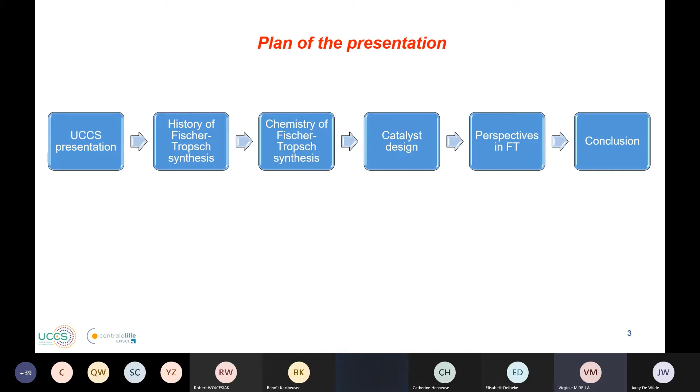Here is the plan of my presentation for today. First, I will make a brief presentation of the UCCS laboratory. Then, as I talk about Fischer-Tropsch, I will start with a brief history of the Fischer-Tropsch synthesis process. Then I will go through the chemistry of Fischer-Tropsch synthesis, meaning I will talk about the products, about olefins, and how this process occurs in Fischer-Tropsch reactors. Then I will talk about catalyst design, mentioning some important parameters such as support, active phase, promoter, and specific catalytic conditions. Then I will finish with a few perspectives for the future in Fischer-Tropsch before I conclude.

So I'm here today because I participate in the PSYCHE project. The PSYCHE project involves plastic gasification using a vortex reactor technology. This gasification produces syngas that can be valorized by Fischer-Tropsch synthesis to produce base chemicals for the chemical industry. So in this project, we have base chemical olefins, and we have the transformation of syngas via the Fischer-Tropsch process. That's what I'm going to speak about today.

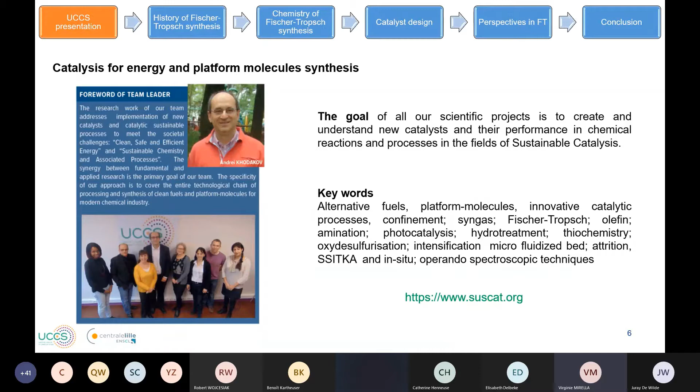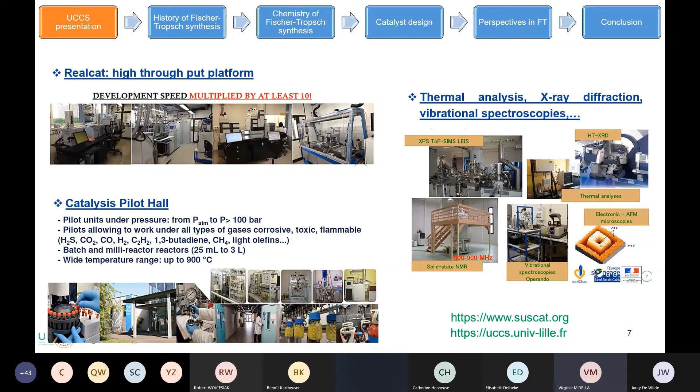In the UCCS laboratory, we have a lot of facilities, such as spectroscopy, microscopy, diffraction and thermal analysis, and so on. We also have good equipment called RealCat, a high throughput platform devoted to innovation in heterogeneous and homogeneous biocatalysis. This platform proposes a series of tools for evaluating catalyst performance, including parallel, continuous, and batch reactors, and bioreactors. We also have the catalysis pilot hall, where we perform a lot of our experiments and develop our micropilot reactors, working at high pressure, low to high temperature, with security measures since we use CO and hydrogen, which are quite dangerous gases. So that's the presentation of UCCS, my team, and the laboratory.

I will continue this lecture with two questions: what is the Fischer-Tropsch process, and how do we produce olefins?

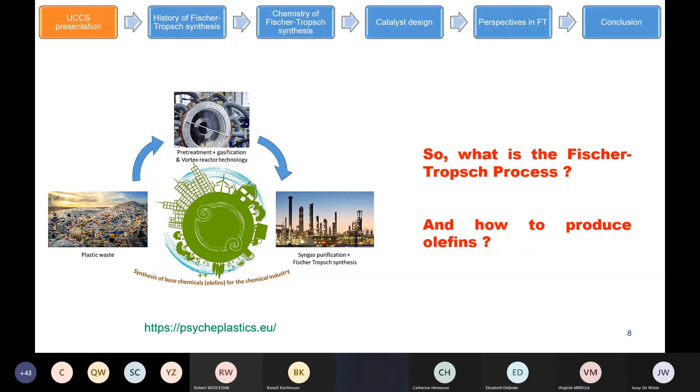Let's talk about the history of the Fischer-Tropsch process. As its name suggests, it was discovered by Franz Fischer and Hans Tropsch in the beginning of the 20th century. Fischer-Tropsch synthesis is a technology with an extensive history of producing gasoline and diesel from coal and natural gas. They developed their research at the Kaiser Wilhelm Institute for Coal Research in Germany.

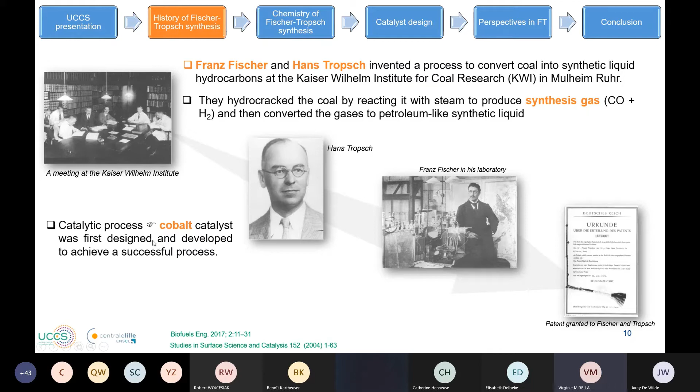They discover that if they crack coal by steam, they produce a synthesis gas that is a mixture of CO and hydrogen, which can then be converted into liquid synthetic fuel. They do this process with cobalt as a catalyst, and when they see that it's really interesting...

The commercialization of Fischer-Tropsch began around 1936 in Germany, and then spread through the world. They performed this synthesis at a pressure of about 1 to 10 atmospheres and a temperature between 433 and 473 Kelvin.

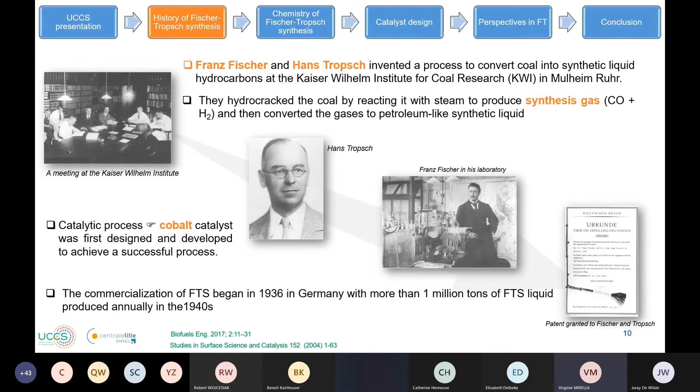Germany exported the technology through the world to the United States, Britain, Japan, France, South Africa, and other nations. In Britain, the University of Birmingham was the pioneer in performing laboratory scale and pilot scale plants for Fischer-Tropsch synthesis.

In the beginning, Germany and Great Britain were the most successful countries, pioneers in developing the generation of liquid synthetic hydrocarbon fuel through Fischer-Tropsch technology.

During World War II, Fischer-Tropsch synthesis provided the needed liquid hydrocarbon fuels for the German war effort. In South Africa, facing isolation during the apartheid era, Fischer-Tropsch catalyst synthesis became known and increased. In the United States, when there was the problem of oil prices during the oil crisis, it also became interesting to develop this process.

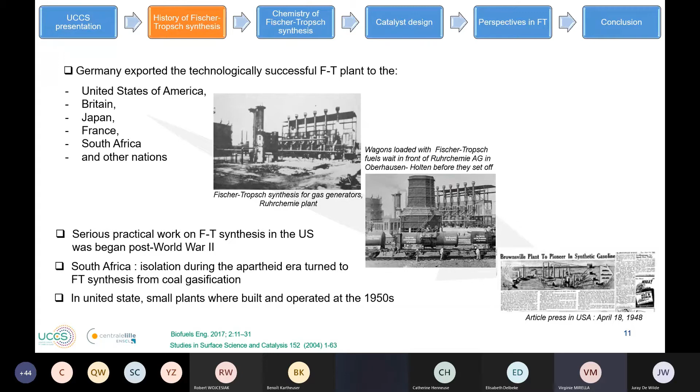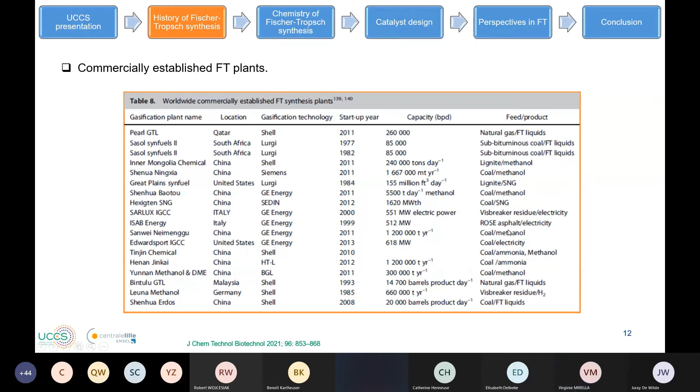The Fischer-Tropsch process has been developed to allow the transformation of gas to liquid and coal to liquid. However, the exhaustive use of fossil fuels is one of the prime reasons for global warming leading to climate change.

So those original feedstocks have now been improved a little bit. The Fischer-Tropsch process has been extended to other kinds of feedstock like biomass, because biomass can be converted to syngas through a gasification process as well.

Using biomass to liquid is suggested to be a positive route to reduce the inclination towards fossil transportation fuels, and is also key to keeping the environment clean. Therefore, Fischer-Tropsch synthesis is viewed as a valuable process to produce super clean fuels from syngas derived from non-petroleum sources.

To this we can add plastic, because in the PSYCHE project, our feedstock idea is plastic. It's the same process - plastic can be used in a gasification process to produce liquid fuels or other fuels, and then it participates also in a valuable recycling chain.

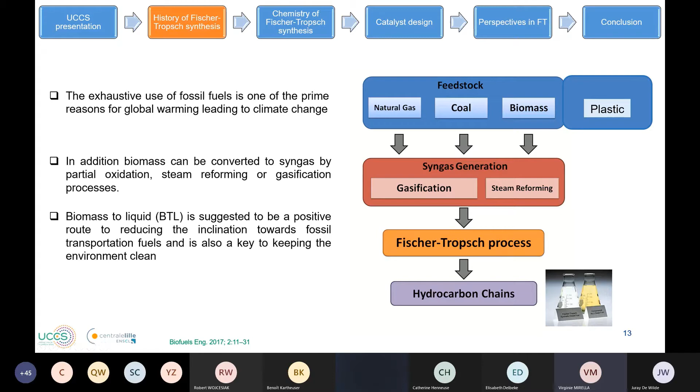Here I present a table of the actual biomass to liquid plants, and the first biomass to liquid plant was established in Freiberg, Germany. You see here they use biomass. Here you can see that all the biomass to liquid plants use solid municipal waste or forest waste, but none of these are sourced from petroleum resources.

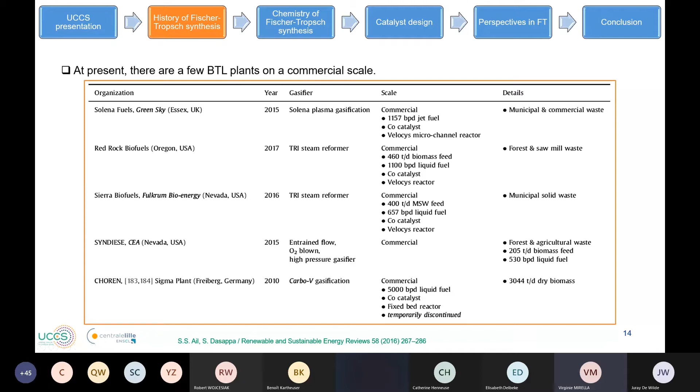So let us continue with the chemistry of Fischer-Tropsch synthesis. Syngas, the mixture of CO and hydrogen, is catalytically converted into a spectrum of hydrocarbon chains, including a fraction of oxygenates.

When the synthesis gas goes to the catalyst, the molecule is adsorbed dissociatively on the catalyst surface, and then an atom of hydrogen can meet an atom of oxygen, producing water.

Here are the reactions of Fischer-Tropsch that can occur, and you see there's production of water. Also, an atom of hydrogen can meet an atom of carbon, forming some monomers, and the monomers in the Fischer-Tropsch reaction can meet another atom of hydrogen, leading to the formation of methane.

One monomer can meet another monomer, forming a short chain molecule like one with 2 carbons, but other monomers can meet longer chains, giving the option of longer chain products. In Fischer-Tropsch we can produce alkanes, alkenes, alcohols and carbonyls, where the carbon number n can range from 1 to high numbers like 20, 30, or 70 - long chains.

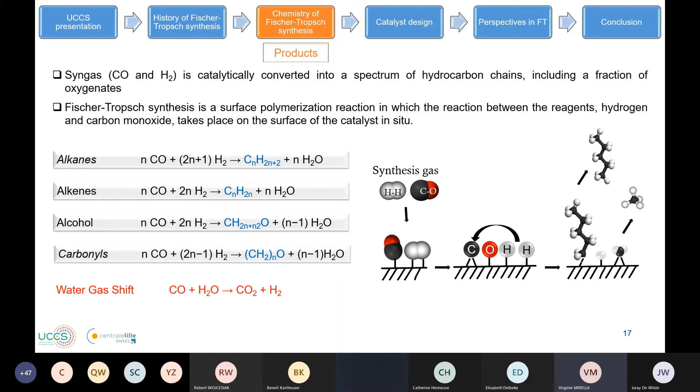So different factors. Here we have the Anderson-Schulz-Flory model. On this model, we can see that we have different products that can be produced from Fischer-Tropsch synthesis, so methane, olefin, C5 to C11, C12 to C18, and C19.

The chain growth probability can depend on the reaction temperature, the hydrogen to CO ratio, and the catalyst composition.

Sometimes, for example, if we put our target on a special window of products, like C2 to C4 products, we can see that this window to have a high amount of these products is quite narrow.

It means that if, for example, the chain growth probability is lower, we will produce mainly methane. And if this chain growth probability is a little bit higher, we are going to produce a higher amount of heavy hydrocarbons.

So depending on the reaction temperature, if we increase the reaction temperature, we are going to limit the chain growth probability.

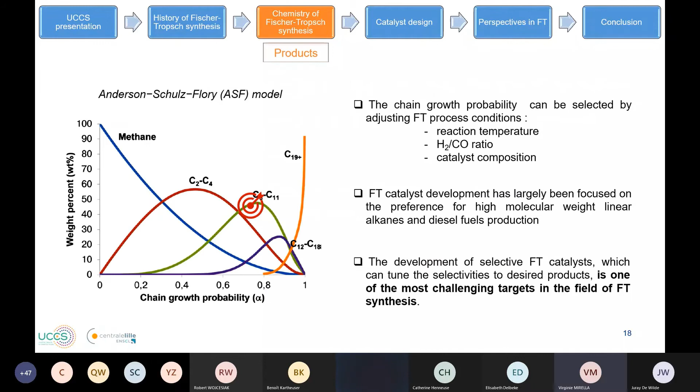So why are we interested in these C2 to C4 molecules? These molecules are called olefins, and the broad spectrum of derivatives results in a very diverse market, ranging from packaging materials, synthetic textiles, antifreeze agents, solvents, and coatings. So from those olefins, we can do a lot of different products.

Generally, they command significantly higher prices than fuels, and they are used to produce intermediate chemicals of really high importance in industry.

Let us see that. Here is a table of the production of organic chemicals in 2010, so 10 years before. This table is really good, and it's difficult to actually find a good table summarizing all this information. Things have changed a little bit, but not that much.

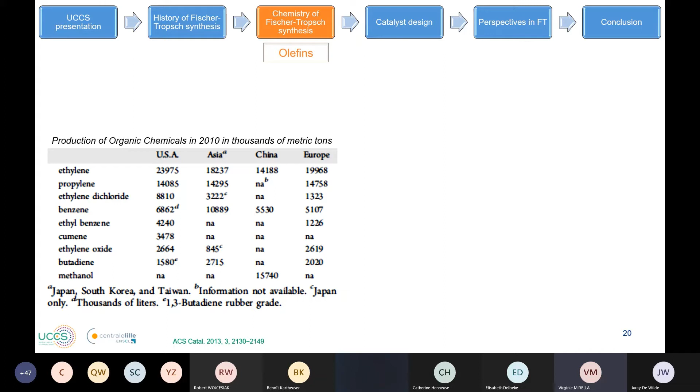If we have a look at this production of organic chemicals, we can see that the first one is ethylene. Ethylene is the largest volume petrochemical produced worldwide, and it has a carbon-carbon double bond. It is one of the most important fundamental chemicals in the petrochemical industry, as it is a source of a variety of products such as polyethylene resin, ethylene glycol, vinyl chloride resin, acetic acid, and styrene. So a lot of molecules that we know, and all those molecules are really used in packaging, textile, and construction industries.

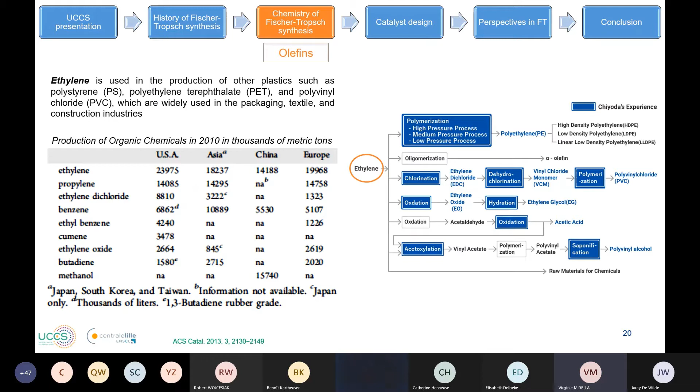We have also propylene. Propylene is as important a basic chemical as ethylene, because it also has a double bond with 3 carbons, and it is used to produce polypropylene resin, acrylonitrile, acrylic acid, and many other products resulting from different processes: oxidation, esterification, saponification, and so on.

And then we have also butadiene. Butadiene has a double bond but with 4 carbons, and it is also a raw material for the production of different types of synthetic rubber.

These synthetic rubbers are in high demand all over the world, especially in Asia, for the manufacture of finished products in the electronics and automotive sectors. Butadiene can also be used for gasoline blending components.

So all those C2 to C4 molecules are really interesting target products and valuable products.

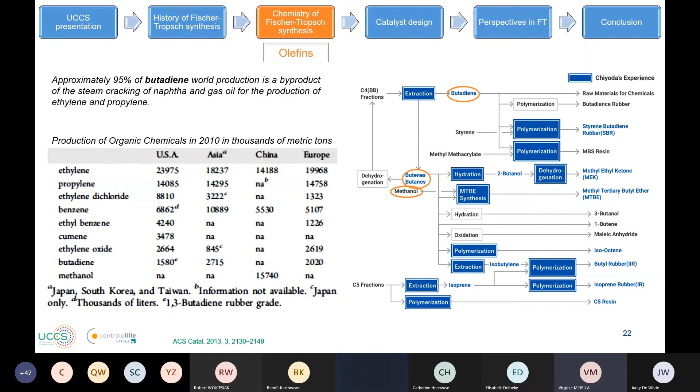So if we want to produce those olefins through Fischer-Tropsch, we also have to manage the reaction temperature and the technology to produce those olefins.

From the history until now, for Fischer-Tropsch synthesis, there are 4 main reactors that are operated over the world. Fischer-Tropsch reaction is a really exothermic reaction, so the design of the reactor is really important, especially to cool down the reaction.

We can differentiate reactors that work at high temperature and reactors that work at low temperature. So let's see a little bit about the reactors. We have the fixed slurry bed reactor.

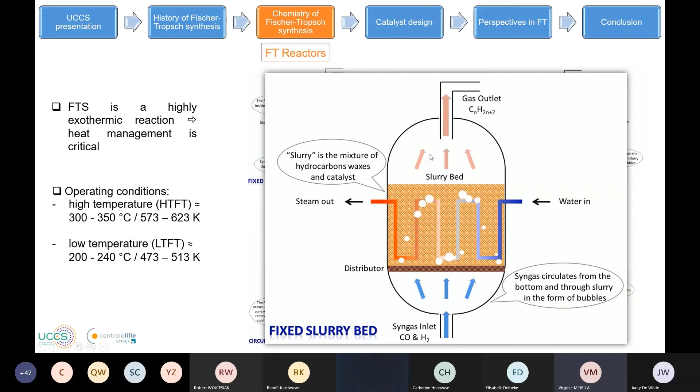In this reactor, the syngas comes from the bottom of the reactor and circulates through a mixture of hydrocarbon and catalyst, and then it reacts to form normally long chain hydrocarbons. Through this mixture of hydrocarbon and wax, we have circulation of water for cooling, to avoid the exothermicity of this reaction. And all the light products go through the top of the reactor.

We have also the multi-tubular fixed bed reactor. It's a reactor with several small tubes. The syngas comes from the top of the reactor and goes through all those tubes, and those tubes are filled with the catalyst.

And the liquid goes through the bottom of the reactor, and we have another exit for the light gas molecules.

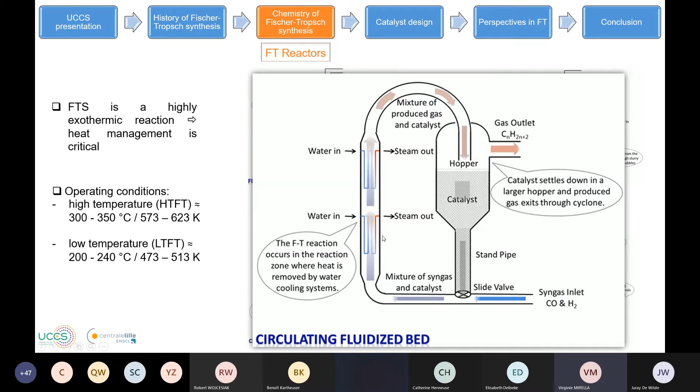Then we have also the circulating fluidized bed reactor, where the catalyst is doing a loop. It comes with the syngas, the catalyst, then we have the water as cooling agent, it reacts, and then we have the exit of the lighter gas molecules, and the catalyst goes through a cyclone to be recovered and continue this loop for the reaction.

And we have the fluidized bed reactor, where we have a bed of catalyst. The syngas comes from the bottom of the reactor, and it's fluidized with the catalyst, and produces mainly light gas molecules that are recovered from the top of the reactor. So we have those two technologies, circulating fluidized bed reactor and fixed fluidized bed reactor, that produce mainly gasoline and olefins.

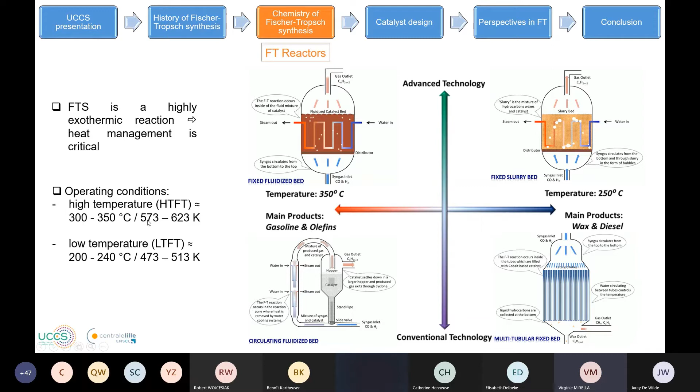So for example, if we want to produce olefin, we are going to focus on those two technologies, but mainly working at high temperature Fischer-Tropsch, meaning between 300 and 350 degrees. So now we have our different feedstocks. We want to produce olefin, but which catalyst to use to produce the desired olefin at this working temperature for producing olefin.

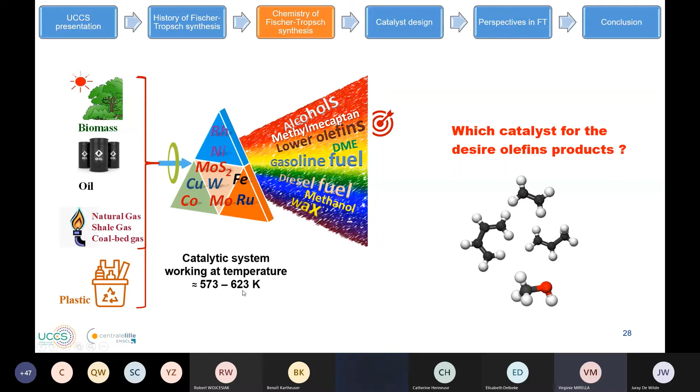So let's talk about catalyst design. For catalyst design, we have to resume different properties. So for a good catalyst, we should focus on chemical physical property, catalyst property, mechanical property. So we have to focus on the chemical state of the active phase. We have to focus on the support. We have to focus on the promoter, the size of active phase, and all those different parameters should be in the right proportion in order to produce our desired products.

So for support, in supported catalysts, the support material usually represents the main component of the catalyst. So it is necessary to take into account the catalyst stability from the point of view of the active phase, and also the support has the same importance. So what we expect from the support: we expect a good dispersion of the active phase. If we have a high surface area support, it will lead to better dispersion of the active phase. We need also interaction between the active phase and the support to avoid, for example, sintering. We need a support that allows heat and mass transfer in an exothermic or diffusion limited reaction. The support should stabilize the active phase and sustain the mechanical strength for the catalyst.

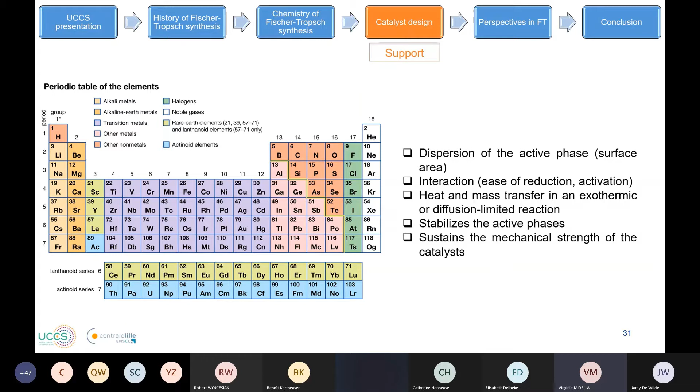So for Fischer-Tropsch synthesis, through later years, a lot of catalysts, a lot of supports have been studied. We studied a lot of supports like alumina, silica support, titania, zirconia support, that are the main supports used for catalyst. But compared with this conventional oxide support, there's carbon materials like activated carbon, carbon nanofibers, carbon nanotubes, mesoporous carbon, that also show interesting results in terms of mechanical strength, good electrical conductivity, high thermal stability, and large surface area.

And so there are also other interesting catalysts like SBA15, hexagonal mesoporous silica, or MOF catalyst, that have also interesting properties as they have high surface area, and it's possible to control the pore size of these supports.

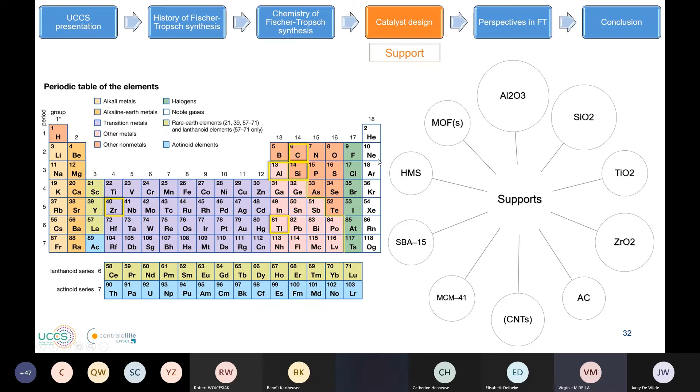So in terms of active phase, usually in the beginning, the first active phase was cobalt, discovered by Franz Fischer and Hans Tropsch. It was cobalt, but then after they studied also iron. So iron and cobalt are from history the first active phase for Fischer-Tropsch synthesis.

But there's also a lot of research made on ruthenium. Ruthenium is one of the most active catalysts for Fischer-Tropsch synthesis. It works at low temperature. But ruthenium is mainly for producing long chain hydrocarbons, and it's very expensive and limited in the world. So we are not going to use ruthenium to produce olefin.

Cobalt has good catalytic performance with a ratio of hydrogen to CO that is quite high. It has good selectivity also to long chain paraffins. It is less expensive than ruthenium, but a little bit more than iron. But we are also not going to use cobalt for synthesis of olefin.

There's also iron. Iron works very well at low ratio of hydrogen to CO, and it is interesting for production of olefin and oxygenates. It is really economical, it's abundant, even if in operating plants iron is less stable compared to cobalt. I mean, cobalt catalyst has a durability of approximately 5 years compared to approximately 6 months in the case of iron.

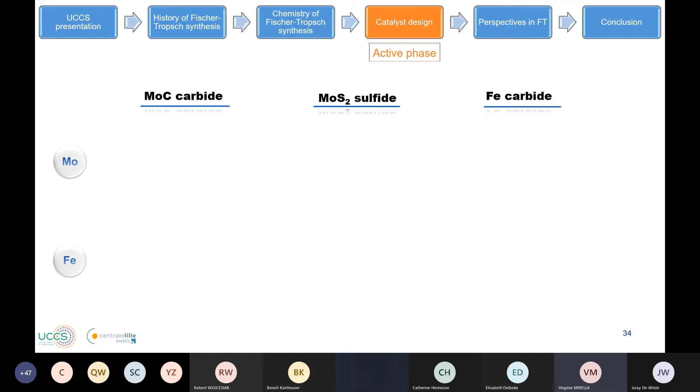I'm going to talk to you about iron, that is a reference, but I would like also to talk to you about molybdenum, because molybdenum has also shown some Fischer-Tropsch activity, not as high as a cobalt catalyst, but it is interesting. I want to talk to you about molybdenum carbide and molybdenum sulfide. We study molybdenum sulfide in our team because it has some Fischer-Tropsch activity, and we would like to evaluate the activity of this support in presence of sulfur. We have also studied molybdenum carbide because it's interesting due to its dual functionality of hydrogen dissociation and CO bond scission. So we studied those two interesting catalysts, and I'm also going to talk to you about iron, that is a reference catalyst, and even though the active phase for iron-based catalyst has been linked to iron carbide, different iron carbide phases are formed, which is still debated in world research. But we are going to talk about those three catalysts today.

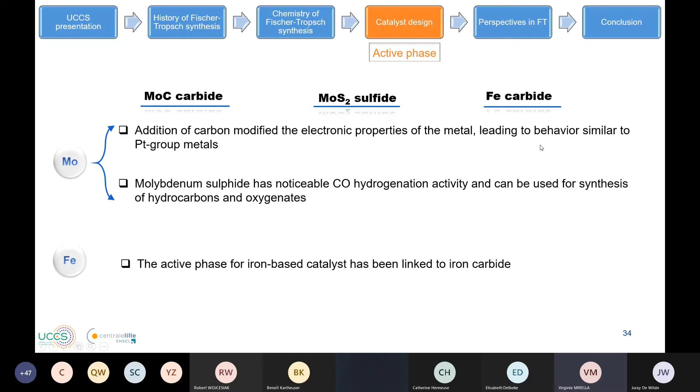So first of all, I would like to talk to you about the activation process of the catalyst. This is really important. So when we have the oxide, it is not the active phase. We need to form the active phase from the oxide that will convert our syngas, hydrogen and CO, to our olefin.

To activate the active phase for molybdenum, to have it in a carbide phase, we activated it under a flow of methane and hydrogen at high temperature for 2 hours to form our molybdenum carbide. For our sulfur catalyst, we use the oxide molybdenum catalyst and treat it in a flow of hydrogen and H2S to have our molybdenum sulfide at 673 Kelvin for 2 hours.

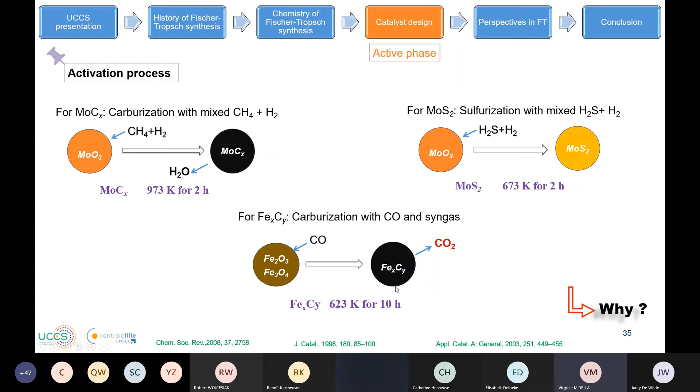And for our iron catalyst, we use CO as an activation process to form our carbide, between 10 hours and 16 hours. Why do this activation process? Why is it important? It is important because the activation procedure will lead to the active phase.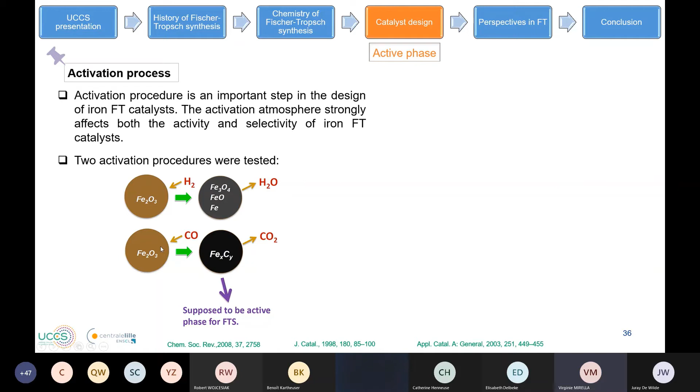For example, with the iron catalyst, we use two activation procedures, one under hydrogen, one with CO. What did we observe? We observed a short transient period for both catalysts, but the catalyst activated with CO was stable with high CO hydrogenation activity and produced interesting olefins.

In comparison, the catalyst that had been treated with hydrogen did not lead to the formation of the carbide phase, but the formation of metallic species. Then we observed a slow increase in activity, a slow increase in the conversion of CO, and this slight increase in CO activation is probably due to the formation of the carbide phase during time on stream.

And of course, the olefin activity was a little bit less. So the activation process is really important to improve our selectivity to our desired products.

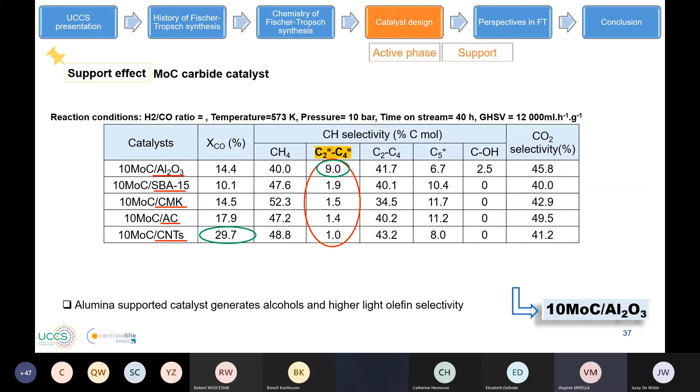So let's talk now about active phase and support. For molybdenum carbide, we used molybdenum carbide on different supports. We observe a lot of interesting conversion with carbon nanotube support. But if we look at the selectivity to olefins, we observe higher olefin selectivity with molybdenum supported on alumina. So we have better interaction between our active phase and the alumina support, and it also produces interesting small quantities of methanol. So for molybdenum, it seemed that the best support with better interaction was alumina.

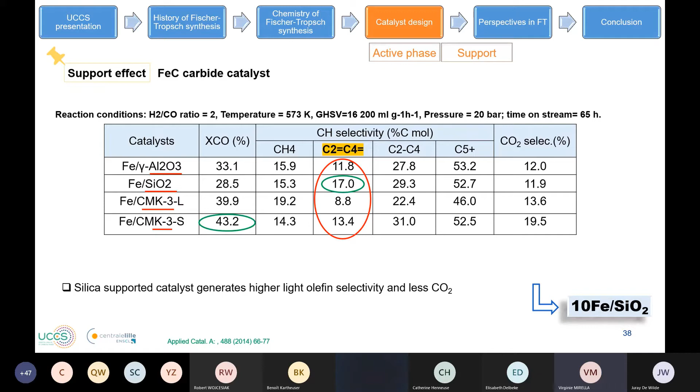We did the same with our iron carbide catalyst. We changed the supports to different supports, and we observed interesting conversion with carbon support. But when we looked at the olefin selectivity, we observed a little higher selectivity when we use silica. So with silica, we had better interaction between our active phase and the silica support. So for iron, it seems that the silica support is a little bit more interesting than mesoporous carbon materials.

For this iron carbide based silica material, we also studied the effect of the size of the active phase. So here we have the pore size of the silica support, determined by adsorption method. We also have here the oxide crystallite size, determined by X-ray diffraction.

And here we have the size of our iron carbide after reaction, determined by transmission electron microscopy images. What we observe is a correlation between the particle size of the active catalyst and the pore diameter of the support. So here we have an increase of the pore size and an increase of our carbide phase size.

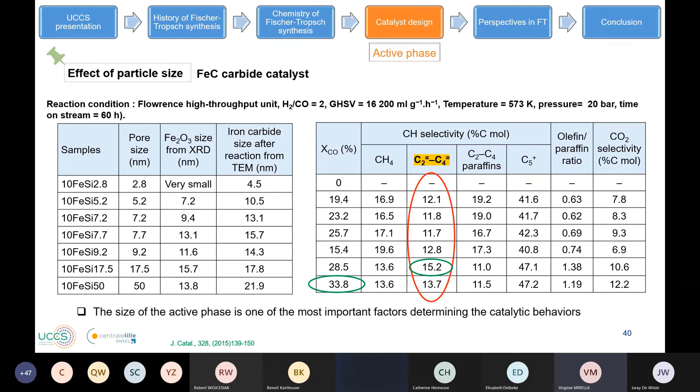In terms of reactivity, we observed high conversion for the catalysts that exhibit the larger particle size. And when we focus on selectivity, we also observe high selectivity with the catalyst that has large particle size. So we conclude from this study that when we have low particle size, we probably have less extent of carbidization, and when we have large particle size, we probably have a better extent of carbidization, which leads to high selectivity in olefins.

So now I'm going to talk to you about promoter, because the addition of promoter can improve the selectivity to our target products. The promoter could affect the structural or electronic property of the active sites. So I will continue my story about the three catalysts.

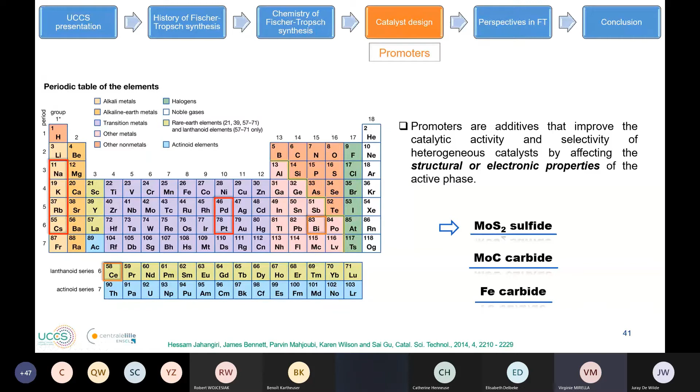Now I'd like to talk to you about molybdenum sulfide catalyst, for which we have studied the effect of the promoter. For our sulfide catalyst based on alumina support, we observed different production of olefins and selectivity depending on the promoter we use. We observed better selectivity in olefin when we use potassium, which favors the most the production of light olefin. So it was more interesting to continue our study with potassium and molybdenum sulfide catalyst.

But which potassium? There are different salts of potassium, so we used different salts and observed the effect. We have an effect because when we use potassium carbonate, we have higher selectivity in olefin than, for example, if we use potassium sulfate. When we use KOH, we observe an increase in C5+ selectivity.

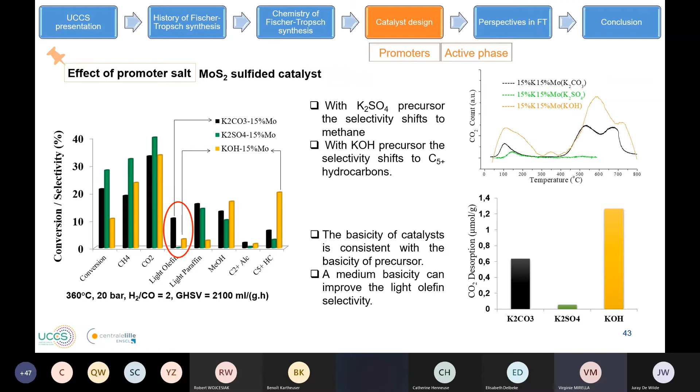In further studies, we did TPD CO2 desorption to study the basicity of our catalyst, and we observed that with KOH we have high basicity sites, while with potassium sulfate we have low basicity sites. This means that to have a high or interesting selectivity in olefin, we need to find a good balance in the basicity of the catalyst. This basicity comes from the addition of potassium.

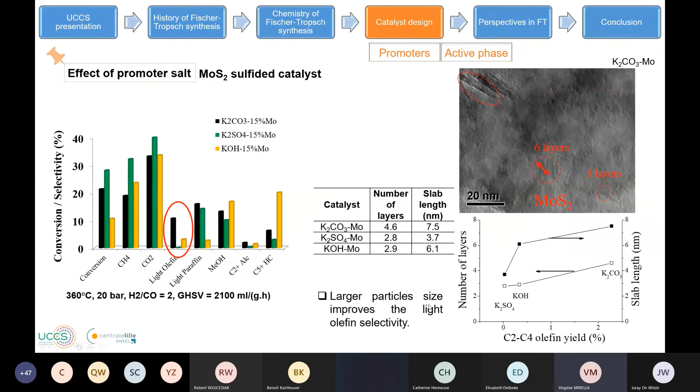We have also observed the particle size effect on this catalyst promoted with potassium. For molybdenum sulfide it's a little different: we studied the number of layers and the slab length to determine the particle size, and we have seen that when we have large particle size, we have better conversion and better selectivity in olefin. So larger particle size improves the light olefin selectivity.

Since potassium brings basicity, we also studied the potassium to molybdenum ratio, and we observed that there's an optimum ratio of potassium to have good selectivity in olefin. When we use too much potassium, we decrease the selectivity of olefin. This observation has been done for alumina support and also on carbon nanotube support, meaning we need large particle size, we need to add potassium to increase selectivity in olefin, and we have to add the right amount of potassium.

We have also varied the conditions. We have seen that when we decrease the pressure, we increase the selectivity in olefins. And we have seen that when we decrease the ratio of hydrogen to CO to 1, meaning less hydrogen relative to CO, we also increase the selectivity to light olefins. So finding good conditions to produce olefin selectivity is really important on this molybdenum sulfide catalyst. We need to work at low pressure and with a low hydrogen to CO ratio.

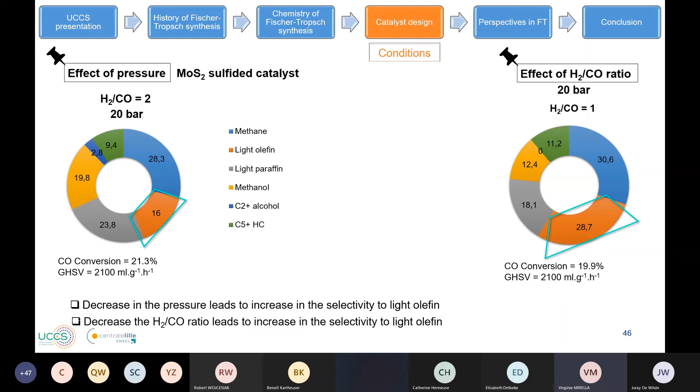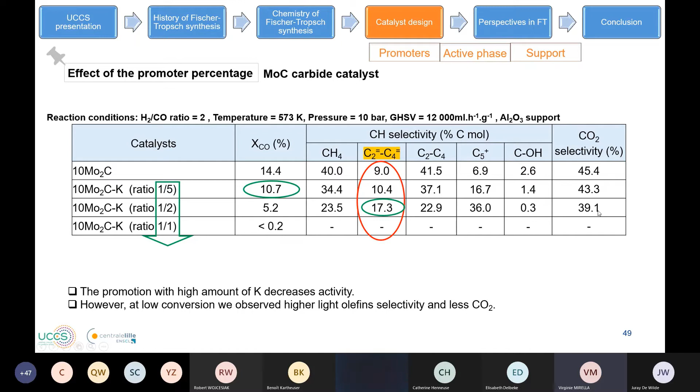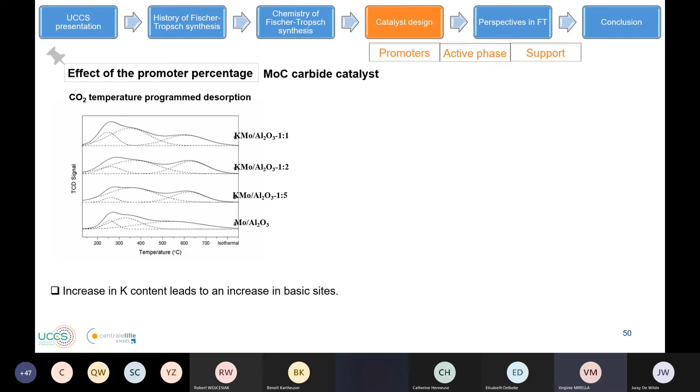So at low conversion, we observe higher light olefin selectivity and also less CO2. We also studied the CO2 temperature programmed desorption, the basicity of this catalyst, and we observe that increasing potassium content increases the basicity of the catalyst. The more basic sites we have, the less conversion we have.

We also varied the conditions with this molybdenum carbide catalyst. We observed that when we decrease the gas hourly space velocity (GHSV), we increase the conversion. And looking at selectivity, when we decrease the GHSV, we decrease the olefin selectivity. What does this mean? It means that with low conversion, we have high selectivity in olefin.

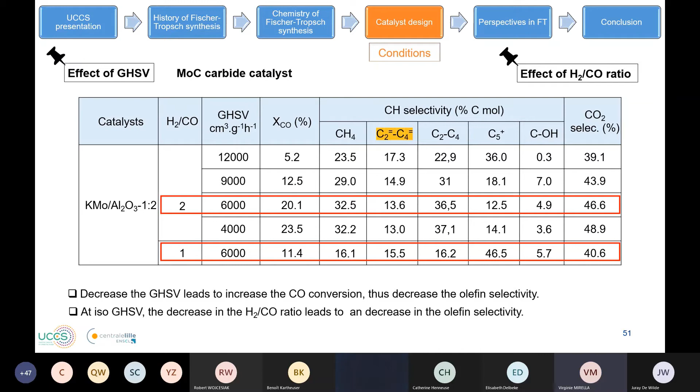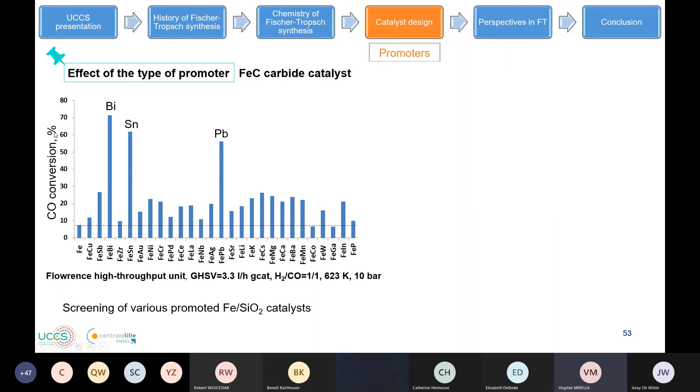When we use another support, carbon nanotube support, we observe exactly the same tendency with iron. When we promote the iron with bismuth or lead, we observe an increase in the selectivity of olefin, but still the same tendency: even with the addition of the promoter, the selectivity decreases when we increase the CO conversion.

We also studied the effect of pressure, and we observe that when we decrease the pressure on the bismuth catalyst, the selectivity is also improved.

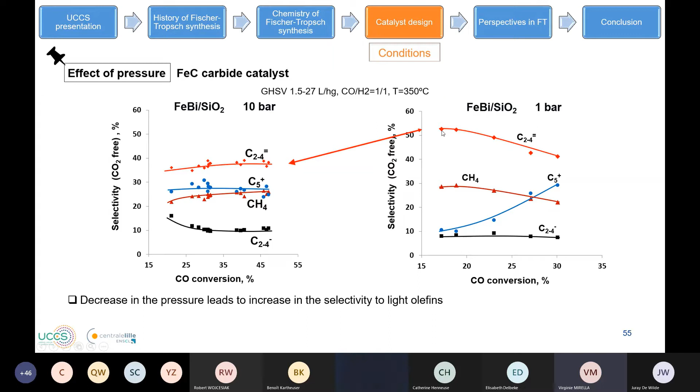Now, before concluding, I'll talk about some perspectives in Fischer-Tropsch. As I've said, Fischer-Tropsch catalysis was based on feedstock like coal, biomass, and natural gas, forming syngas—CO and hydrogen—to produce liquid fuels or olefins. More people are now interested not in CO, but in the hydrogenation of CO2, since we have a lot of CO2 in the atmosphere and many processes produce CO2.

The idea now is mainly to valorize this CO2 via a Fischer-Tropsch process, for example using hydrogen not only from gasification, but from electrolysis of water. This is the concept of what we call the power-to-liquid process. This is also for producing olefins from sources different than coal, biomass, or natural gas. For the hydrogenation of CO2, iron catalyst seems to be more effective than cobalt.

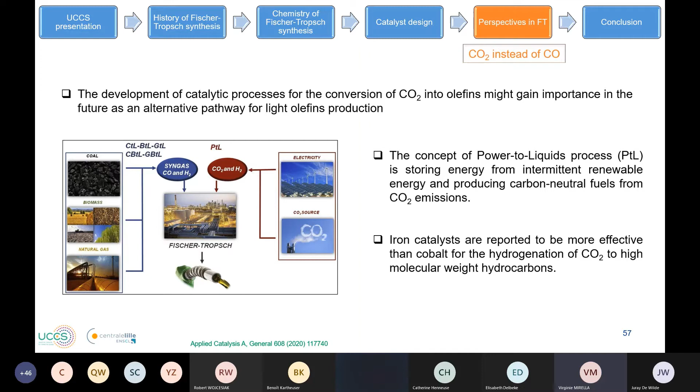Another perspective is based on the reactor. A lot of researchers now are focused on microchannel technology, which offers new possibilities for Fischer-Tropsch synthesis, allowing a highly compact unit that increases process intensification. Also, with this microchannel reactor, we have better control of the temperature.

With microchannel reactors, we just fill the channel with the catalyst, and now some researchers are trying to coat directly the wall of the microchannel with the catalyst. So with reactor design, there are a lot of new challenges also for the production of olefin and the improvement of the Fischer-Tropsch reaction.

And then there's also photocatalysis. This is a different type of reaction, but for example, here we use solar energy. We also use a catalyst, and it's a promising way to valorize syngas. In our team, there's a researcher, Vitaly Ordomsky, who is currently working on this topic of photocatalysis.

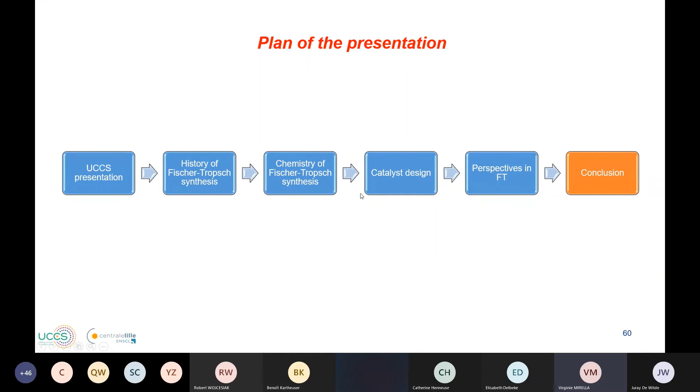So now I will conclude my presentation by resuming a little bit about my illustration. The Fischer-Tropsch process is a well-established process in the world that is coupled to a gasification system. There's really an important relationship between structure and catalytic activity in the Fischer-Tropsch process.

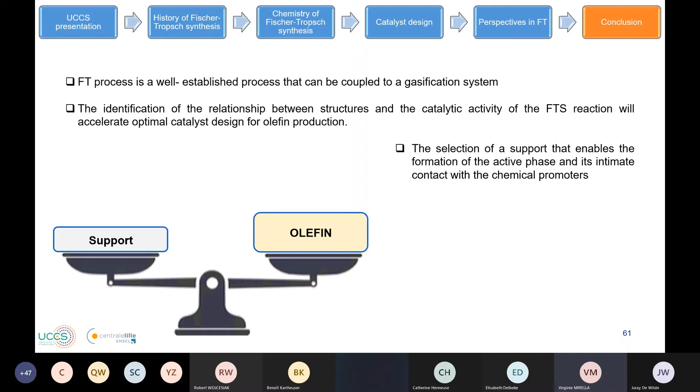I tried to show you with molybdenum sulfide, molybdenum carbide, and iron carbide catalysts what we've seen to have better selectivity in olefins. We have to choose the proper support, because the selection of a support enables the formation of the active phase and intimate contact with the chemical promoters. We also have to choose the right promoters if we want to produce olefins, with the adequate choice of promoter to increase selectivity to olefin and minimize methane production and higher hydrocarbons.

We also have to pay attention to the size of the active phase. When we have particles too small, probably we don't achieve high olefin selectivity. So we have to pay attention to the size of the particle, but also to the dispersion of this particle on the support. And then we also have to pay attention to the reaction conditions.

We have to work at higher temperature to produce olefin. We have to work at lower pressure if we want to produce olefin. We have to be careful also about the gas hourly space velocity. And if we want to produce more olefin, it's better to work with a low hydrogen to CO ratio, which is what we also illustrated during this presentation.

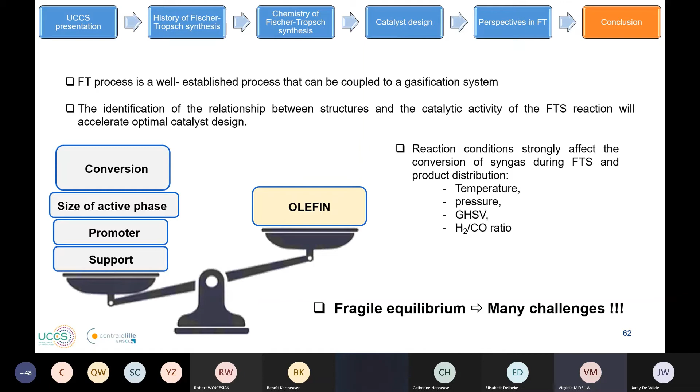So to produce olefin is a fragile equilibrium, but there are still many challenges to try to find the good balance to produce olefin via the Fischer-Tropsch process.

Here is a list of people I would like to acknowledge: my previous students Chang Liu, Kang Chang, Tong Li, Bangu, and also Alan Barrios, a current student, and Daisy Perron, the postdoctorate. I would like to thank Andrei Khodakov, Vitaly Ordomsky, Robert Wojcieszak, and Christophe Dujardin, and also all the members of the PSYCHE Interreg project. Thank you for your attention.

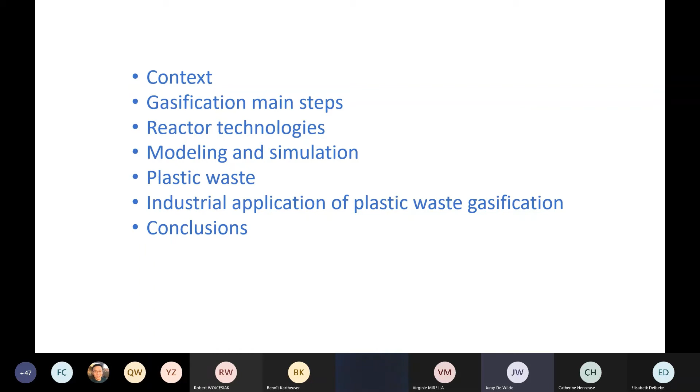Pyrolysis is an option, and it is often combined with reforming on a catalyst, aiming at producing mainly hydrogen then. And then if people even consider feeding to crackers, then there is gasification, either air gasification or steam gasification, and there the aim is to produce syngas or energy.

You see an overview of different types of waste and an evaluation in terms of product quality, fuel quality, and so on, to look at the potential of those wastes. Here you see solid waste fuels, then wood waste, sludge, dried sewage sludge, and then here are non-recycled plastics. And then here are tires. What you basically see is that plastic has some potential in terms of energy content.

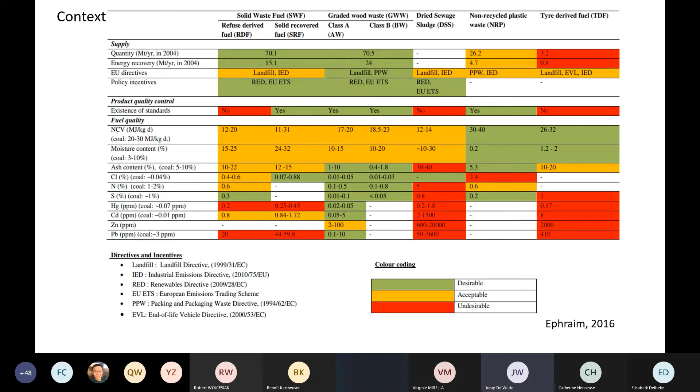There are some disadvantages, however, and that is mainly that there is more chlorine in it that you will have to deal with, requiring either a pre-treatment or post-treatment. And then the same for a little bit of sulfur here, but still within acceptable limits. It's mainly chlorine that is a problem. So we are focusing on gasification, and let me show you here what the main steps are in gasification.

You have to dry if there is water. For example, for biomass waste, there is 10 to 20% of weight percent of moisture. That requires a lot of heat, in fact, drying.

Then the first step is pyrolysis, which also requires heat, as we will see. You produce gases, liquids and oxygenated compounds. Liquids are often referred to as tar. And then you produce typically a solid, char, which will play an important role later in the reduction.

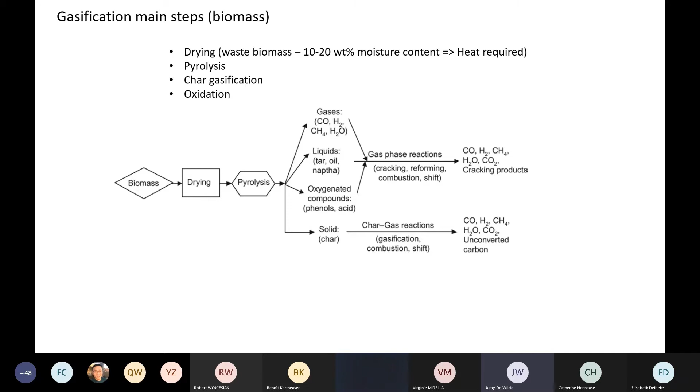So those gas reactions, this is where the gasification reaction as such takes place. You will gasify the char, and the gas phase components and the liquids can also undergo cracking and other reactions at high temperatures. What you end up with is basically syngas. But of course, conversions are not 100%. You will have some tars remaining, and that can be a problem. Those tars have to be removed. And depending on whether you go for plastics, you will have to deal with those other components, as I mentioned.

So some more details about those different steps. Pyrolysis is thermal decomposition in the absence of oxygen. It requires a lot of heat, and primary products are gases: hydrogen, methane, CO2, and then some C2s, C3s, and condensables and char. The relative yields of those products and the exact composition of the liquid that is formed depend on the composition of the wood or the waste, but also on the heating rate, pyrolysis temperatures, and the residence time, and so on. So it's a quite complex operation to manage, and often there are heat transfer limitations.

Then the char, as I mentioned, will undergo gasification reactions. Again, a lot of heat will be required, and you can gasify with steam, with CO2, and even with hydrogen, and then there is the water gas shift reaction that will take place as well. But not all of those three reactions are equally important. Here are some relative reaction rates at 800 degrees C, and this pressure. Steam gasification is much faster than CO2 gasification, and gasification with hydrogen is almost negligible in rate.

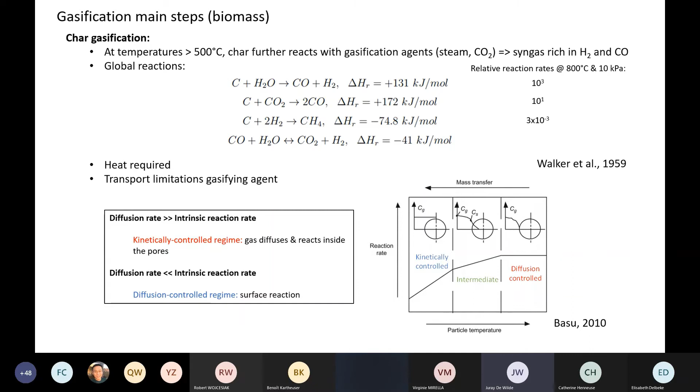That heat needs to come from somewhere, and that is from combustion, from oxidation, combustion of the remaining carbon, but also of gaseous products. It can be done using either air, but then you introduce nitrogen, which may reduce the calorific value and so on, or you can use pure oxygen. It also has an effect on the temperature, the maximum temperature that you will reach in the reactor, and hence on the slag, on the ash formation - will the ash melt or not? But anyway, combustion products can serve as gasifying agents eventually.

So the reactions are shown here. Carbon can react to CO2, CO to CO2, and so on. Tar can also be partially combusted. So that's what makes the control of a gasifier somewhat difficult, and there is the coupling between the heat produced from the products of the pyrolysis and the reduction reactions, the gasification. The heat produced here must compensate the heat requirements in the gasification zone, the pyrolysis zone, and the drying zone, and that heat produced depends on the products of those zones. So there is a coupling.

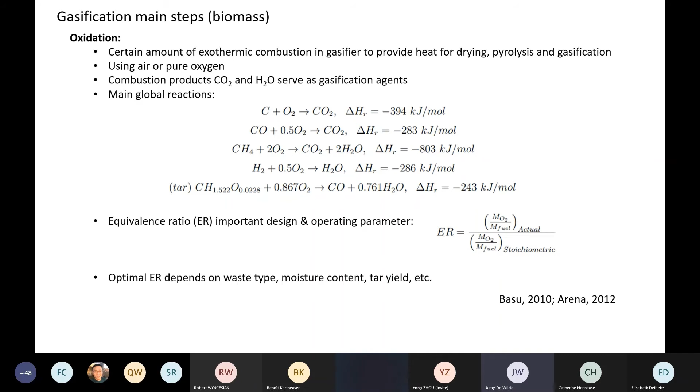So now you have to manage these three reactions in the best possible way, looking at the different constraints, and depending on which aspect is most limiting, you can choose different reactor technologies. The aspects that can be limiting are various, they can be purely technical or economical.

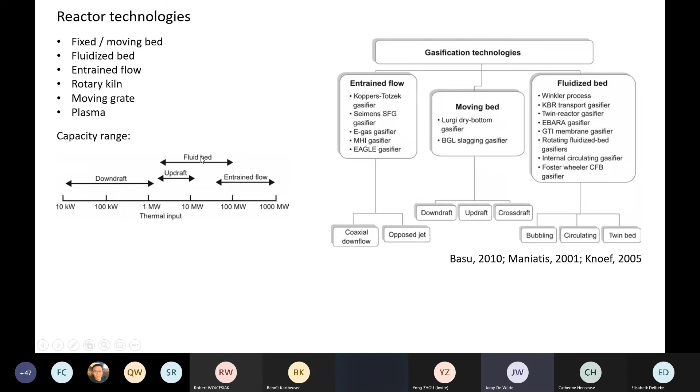Some commercial suppliers of those reactors are shown in the right figure here. Depending on what capacity range you are looking at - capacity is one of the constraints - your choice depends on that. You see that fixed bed downdraft gasifiers are preferred at small scale. When you go to larger scale, you go either updraft fluid bed, and then entrained flow is for very large scale. That's roughly the situation.

So concerning fixed bed, moving bed, it's in fact a relatively simple technology. You all had the coal stove at home with your grandparents probably, it's a little bit similar. But there are two types, and the advantage of the simplicity is that even at small scale it is economically viable - the cost is sufficiently low.

There are two main types: updraft and downdraft. Updraft is countercurrent, and the particles are always fed at the top and move under gravity downward. If you go down in downdraft, you are co-current; in updraft you are countercurrent.

Now if we look first at the updraft situation, you will feed the air or oxygen at the bottom. Let us look in the direction of the particles: they come in, they dry using the heat from the gases that go out. Then they come into a pyrolysis zone, using the heat of the gases that come from the gasification zone.

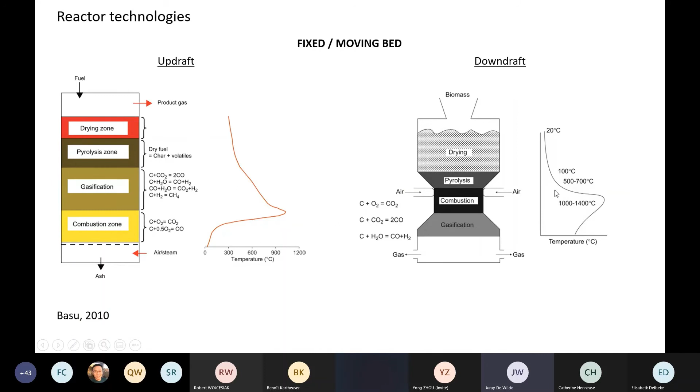Equipment efficiency is generally high, and you can work with relatively low oxidant requirement. Those units are typically operated at low or moderate pressure, and you can use relatively large particles as feedstock, so the feedstock preparation is less complex. On the other hand, there is a limited ability to handle fine particles. They would plug the bed, and this bed has to be kept in motion.

In general, the feedstock has a quite long residence time, but it depends a little bit on the feed size distribution. You need to give that the necessary attention, and of course you can control operating parameters like the flow rate and so on.

There are two ways of operation, and it also depends not only on whether you use air or pure oxygen, but how much steam you use. You can work in dry ash mode, where the ash is removed as dry ash when you operate with less steam, or in slagging mode, where the ash will be melted and removed as a slag. That steam content will affect the hydrogen to CO ratio in your syngas.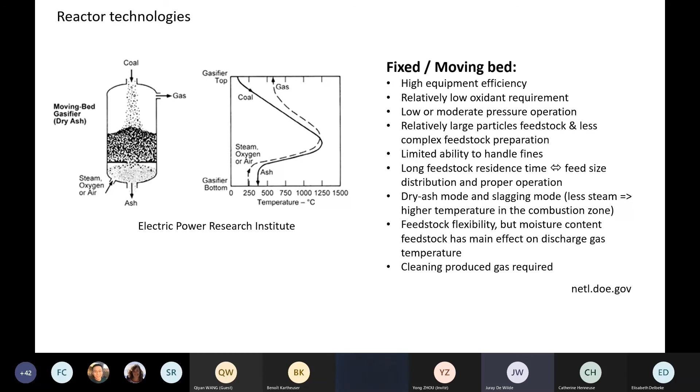The next technology is fluidized bed, where there are again different options. You know that fluidized bed is a technology that covers a wide range of regimes, so there is the bubbling fluidized bed used in practice, or the circulating fluidized bed, where you entrain the particles and circulate them around.

In general, fluidized beds are known for their efficient mixing and temperature uniformity. Feedstock will be immediately mixed with already reacted solid in a bubbling fluidized bed. Typically you work with an inert bed material—sand is often used—and for the rest the bed material will be mostly char.

Again, because of the presence of this inert material and the temperature uniformity, you have a quite high tolerance on fuel quality, and there is big thermal inertia in the bed, which explains the stability of operation somehow.

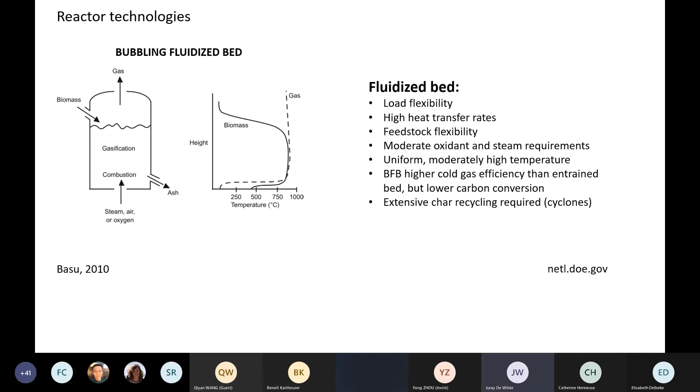Okay, but it requires quite some char recycling, and so the cyclones are quite charged.

Again, the temperature uniformity is quite good, but it depends a little bit on what feedstock is used. This is here for coal. You have, on the other hand, quite large oxidant requirement, and you operate at very high temperatures.

A characteristic of entrained flow is that you operate at very high velocities and extremely turbulent flow. Particles are typically quite small, so you have very rapid feed conversion, and because of that you can have a high throughput. The residence time is only a few seconds here.

And you can feed that feedstock dry or as a slurry. Of course, if you feed it as a slurry, you have to evaporate more water, and logically the thermal efficiency of the apparatus decreases.

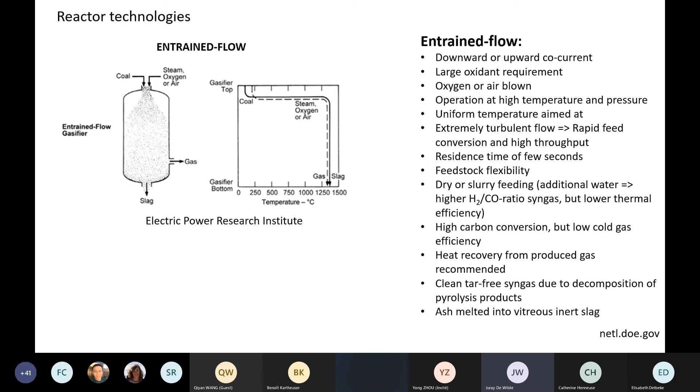These are other figures for entrained flow, upflow, downflow for biomass gasification, but nothing to say here in view of time.

It's slightly inclined towards the discharge point, and it has an independent control of the axial speed by means of the rotation. The rotation speed will control the axial speed, and so that gives it quite some flexibility.

This can be used with a wide variety of feedstocks, meaning particle size can vary, the moisture content can vary, and so on. You can just adapt the axial speed very easily.

The major challenge then becomes the flow control of the oxidizing medium, because you want to avoid a too high temperature. When you burn everything too locally, you would have an excessive temperature. So what they do is design systems that distribute the air over the entire length of the rotating kiln in order to prevent those hotspots.

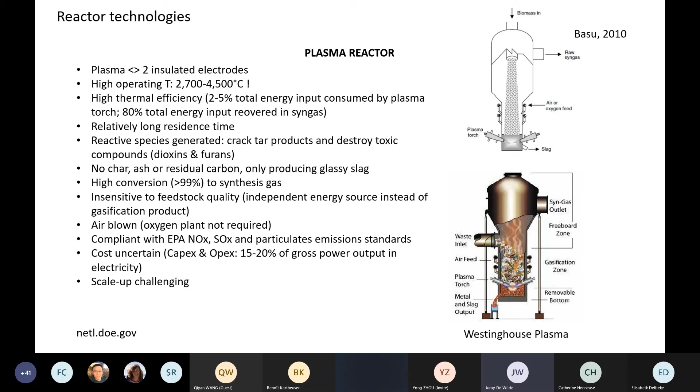Then there is a section on the tar content, which is, of course, as I said, lower in downdraft gasifiers and in plasma reactors, and problematic in the other types of reactors. Yeah. Okay, but in view of time, I think I will not rediscuss everything here.

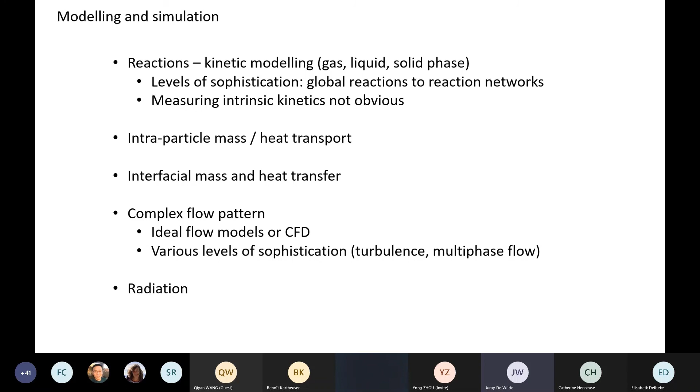The lifetime distribution is not unexpected. It's mainly packaging that has a very short lifetime, but other plastics also have relatively short lifetimes, and then you have to do something with it, or you pile up the waste. So the idea is to try and use

existing technologies to close the loop. You can of course mechanically recycle, but that has limits - you can only do that a couple of times, and the quality is gradually reduced. So chemical recycling is really aiming at producing virgin polymers by starting again from the building blocks of the polymers. You break down the waste to the building blocks and start over again.

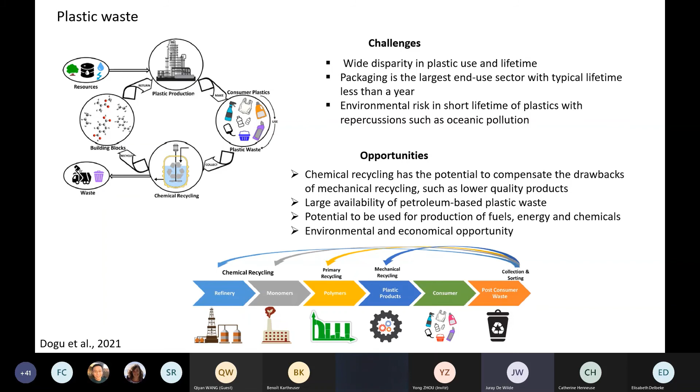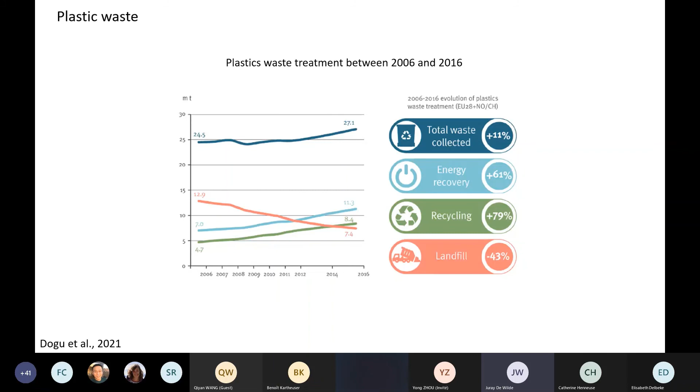There is a positive evolution in recycling, negative evolution in landfill, which is a little bit discussed at the moment, because if you want to reduce CO2 emissions, burning plastic for energy recovery is not the best option. You see that people are burning more and more plastic and recovering at least the heat, the energy. But that of course leads to CO2 emissions. You can argue that if you want energy, you will have CO2 emissions anyway. But landfill is of course the easiest option to reduce CO2 emissions.

But closing the loop is what we aim at. It's a little bit more complex, and so

plastics are simple and complex in a way. They are complex because of additives. Pure polyethylene would be relatively easy to deal with, even easier than certain vacuum gas oils, but those additives, dyes and glues make it a little bit more difficult, and so you will have to do either a pre-treatment or a post-treatment. That's what we are also working on, Steven de Meester, in this project.

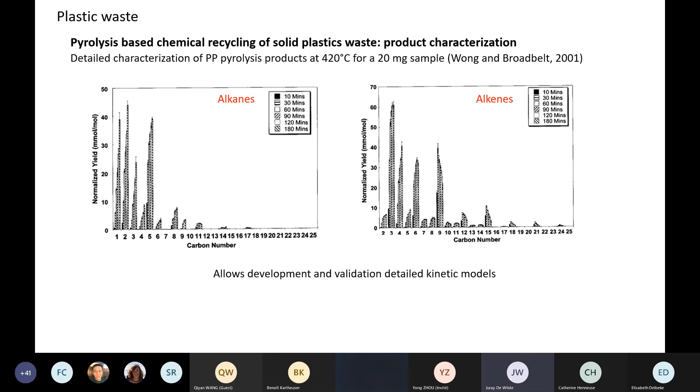More and more detailed characterization of pyrolysis products is done, and that allows development of detailed kinetic models that go a little bit further than the lumped kinetic models shown here. Typically, and that's also in biomass gasification, people use lumped models where you go from your plastic to something called gas with a composition that you have to provide. If you want to simulate it, you have to provide the gas composition. It has to be measured, and it will be a function of temperature and of course of the waste that is used.

And then your liquid, condensable, again with a certain composition that you will have to measure and impose in the simulation code, and it will again be a function of temperature and so on, and char. Then that goes to other products in the next step. So those lumped kinetic models are very popular, and people simply measure at different temperatures the composition of their lumps.

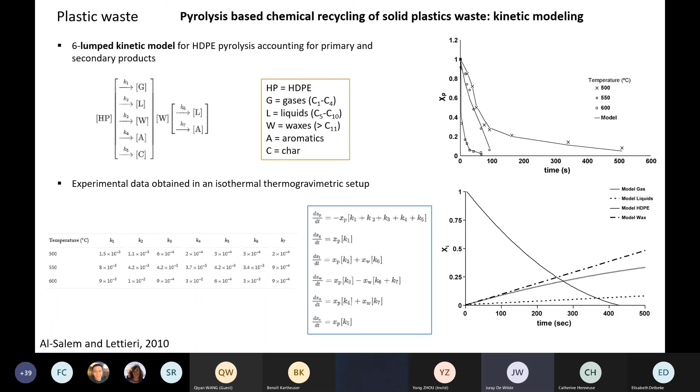And the problem is once you start to mix waste products for gasification, two different kinds of plastics or anything, you cannot just add up the resulting gas composition. It's not a weighted average of the two gas compositions of the two primary products you used. It's not like that, because those different components will react and interact with one another. At that moment you need a more fundamental description, done by developing reaction networks and looking at the elementary steps of the molecules involved.

And that requires network generation, and of course also determining the rate determining steps and the rate parameters, some of which are estimated from experimental data. So there are several groups working on it. The reference is given below.

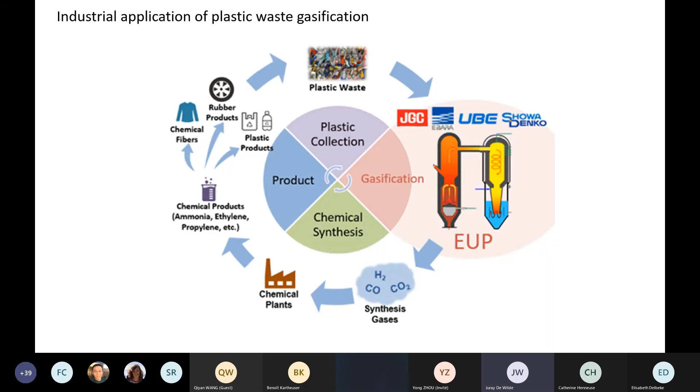Let me skip this slide here. So then, industrial application of plastic waste gasification. There is some progress. There are some companies, and there is an example here of Ebara, who uses pressurized internally circulating fluidized bed.

They carry out gasification in two steps: low temperature, high temperature, and the high temperature is there to avoid dioxin formation from the plastics. Because of the high temperature operation, they have to remove the slag. The ash can be removed as a molten slag, and that can be reused in the cement industry and so on.

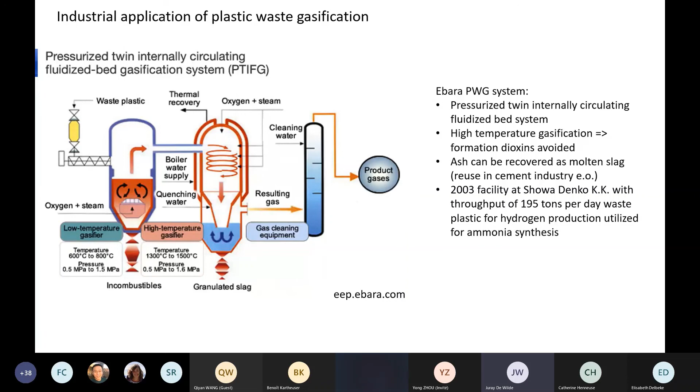This facility has been operated since 2003, with a capacity of 195 tons per day. And the syngas produced was used for ammonia synthesis.

I had some backup slides here, but I don't think I will have the time, so I'll leave some time for questions eventually. So gasification is in fact a well-known technology in industry, first coal and then biomass. But now there is a renewed interest, a few years ago because of biomass, and now because of plastic waste.

There are various reactor technologies, and there is not an optimal reactor choice. It really depends on the application, meaning the feedstock and what you want to do with the syngas. As I showed, plastic waste gasification has some specific challenges, which is why there is still research going on in this field, and also in terms of optimal reactor design. There are some first commercial applications reported.